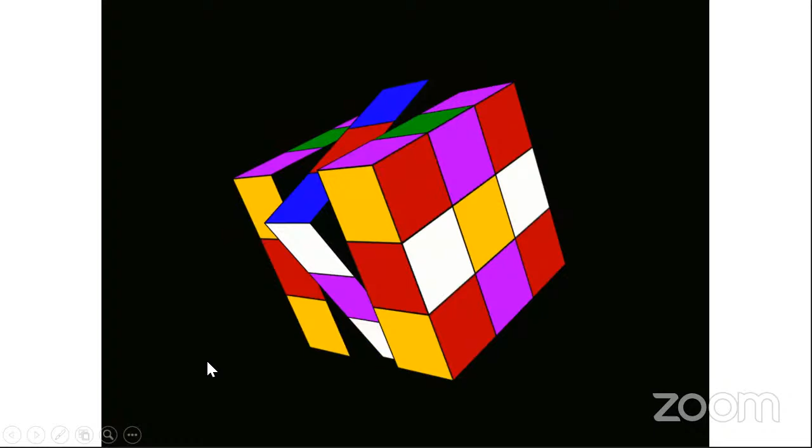So if your passion is problem solving, then definitely look at this Rubik's Cube. If you're interested in getting the solution for this Rubik's Cube, definitely you are here for the right choice of program of study, which is called engineering.

What does engineering do? Engineering is primarily to fix broken problems, because there are either opportunities for something new or something already broken that needs fixing. As the Vice Chancellor said earlier, quoting Einstein, the training of the mind is to think more than the actual fact obtained. And that's exactly what engineering does.

Scientists tend to explore the natural world and discover new things about the universe and how it works, whereas an engineer applies that learned knowledge to solve practical problems, often focusing on cost, efficiency, and other limits. Scientists observe the world, while engineers focus on creating it. And that's where thinking matters.

The modern era we live in would not have been possible without the marvels of engineering, as the Honorable Vice Chancellor mentioned earlier—whether it be a microchip, high-speed vehicles, mobile networks, automated cars, electric vehicles, whatever you see right now, or even these automated assembly lines.

Scientists generally investigate what is already present, but engineers tend to create what has never been there before. So it's actually a science to describe electromagnetic radiation, which you must have studied in the 12th standard, but it's actually engineering to build a radio or a television. Many of the so-called wonders of modern science are actually wonders of modern engineering.

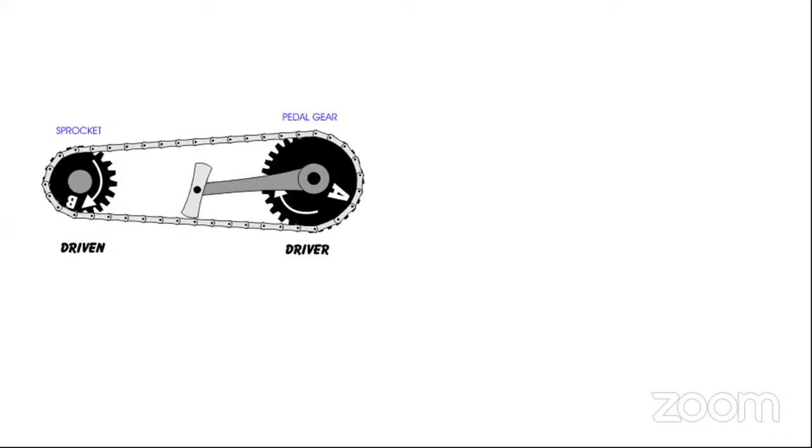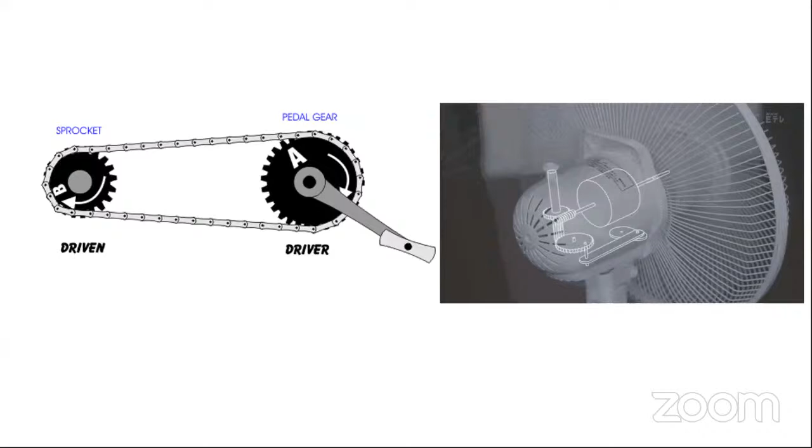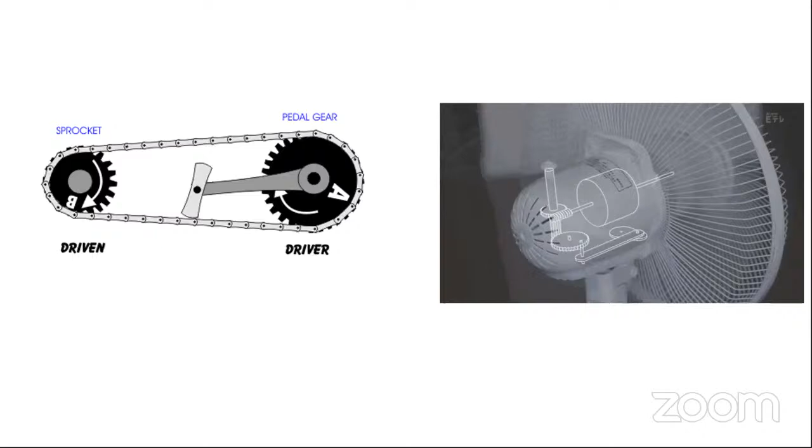Look at this standard cycle, which most of you would have used, at least in younger age - the pedal and the gear. This is nothing but a standard cycle, but if you're more interested to know about this, this is exactly where engineering comes in. Or look at this in terms of the worm gear - this is typically a table fan, which some of you must be using. You can see the transparent gear, the worm gear, which actually makes the fan rotate. That's nothing but engineering. But actually, we miss out on many of these day-to-day common things of engineering.

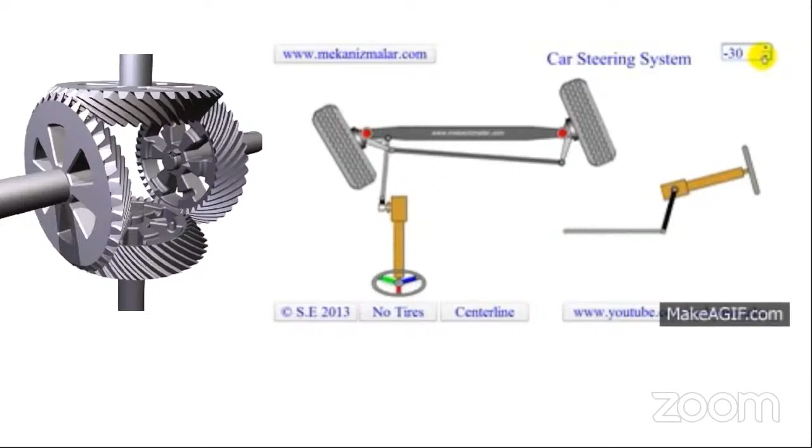Or look at this - this is nothing but a worm gear, used as a tuning mechanism, including in your guitars, mandolin, and things like that. See this example. This is a car steering mechanism, where the steering is used to turn the front wheels either left or right, depending on how you'd like to do that. If you're interested to know how these things work, then engineering is the right discipline for you. There are very interesting things to find out, because these things have existed for a while, and we believe there is something which invokes curiosity in our minds.

Given this, I also thought I should show you a small picture of these automated assembly lines mentioned earlier. Look at this. If you're interested in working in these kind of shop floors, then this is exactly where you need to look at engineering. Or if you're looking at this situation, where you have a remote control with a robot, where you'd like to have your dog playing around doing tricks and all that, then you can actually build some of these things in engineering and get your curiosity filled.

I'm sure you would have seen it from some of your friends or probably in movies. But if you want to do it for yourself, you can actually do it in the labs here. This is the beauty of engineering.

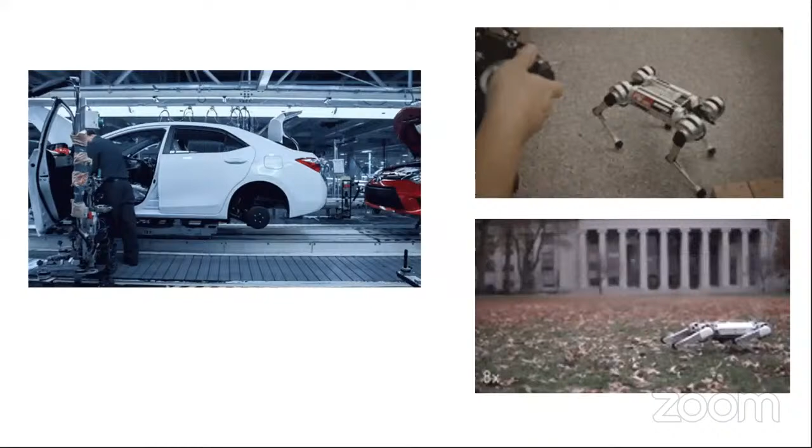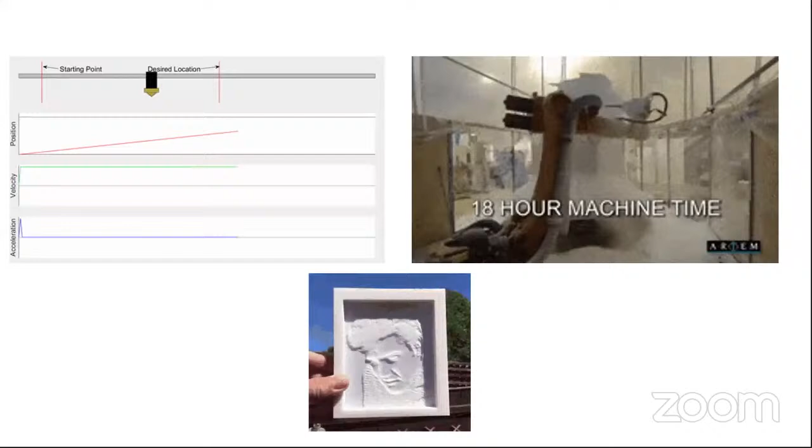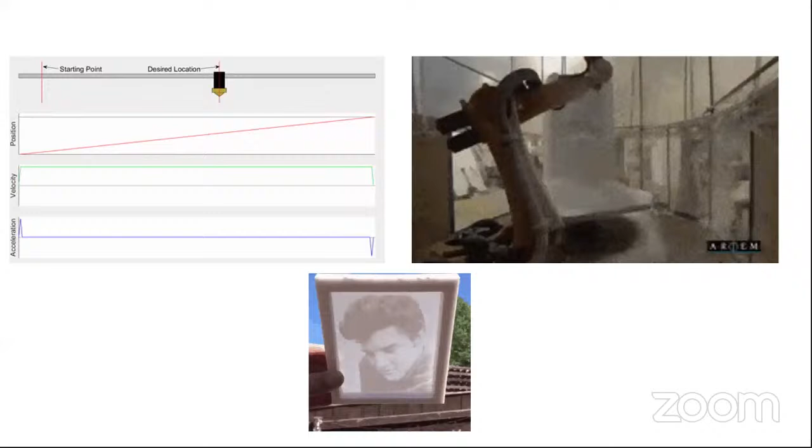Or look at this - this is what we call a computer numerical control machine, CNC machines as we call them. Look at the other side, on the right-hand side, on how it's trying to build. Or look at this other one - these are nothing but the 3D printing machines which you have. And we are living in the future right now, as you can see a 3D picture of Elvis Presley. In fact, if you want, you can do your favorite Sachin Tendulkar or any cricket fan, whomsoever you like. That machine, which you can see, is the one which actually translates down into the lower frame, which decides how it goes about.

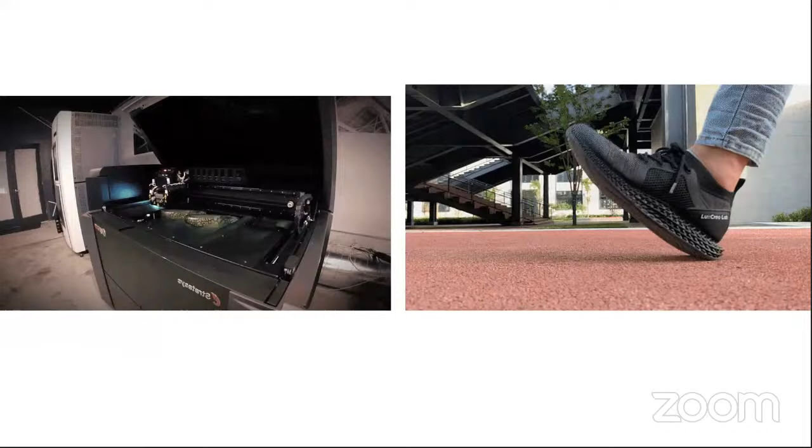Or look at this, another example of a small 3D machine which is actually printing. And look at this picture on the right, where it's enabling you to do 3D printing of a waterproof shoe with the midsoles and all that, which is actually being claimed and practiced using the current day technologies of engineering.

Or look at this aspect of what we talked about - synthesizing connections across areas. There's a purple colored chair of 3 different types here, and then you have the various components, which looks like an IKEA showroom piece, and then you have the small components of an aeroplane wooden piece assembled. Now, if you want to synthesize all these connections across, this is exactly what engineering does. So synthesis is nothing but combining information from multiple sources to form conclusions and then act upon it.

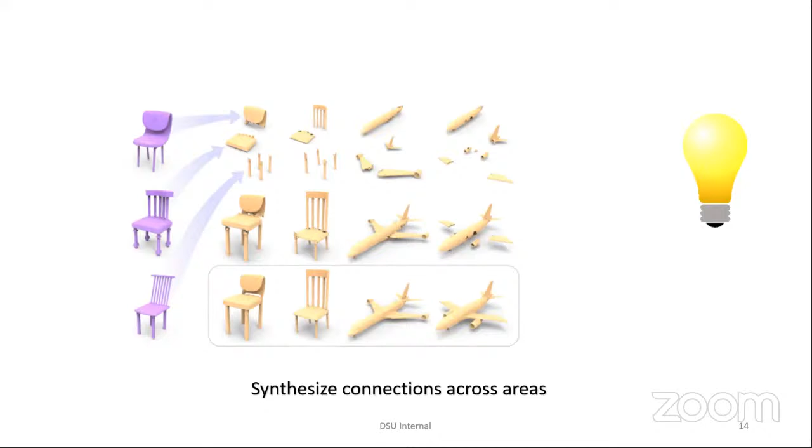Synthesizing is nothing but putting it together as your thinking changes. So all this is actually leading you to synthesizing connections.

Look at this small gearbox of your watch, the metal watch on the side. Each one of the gears is connected to each other, as you can see clearly in this animation going across.

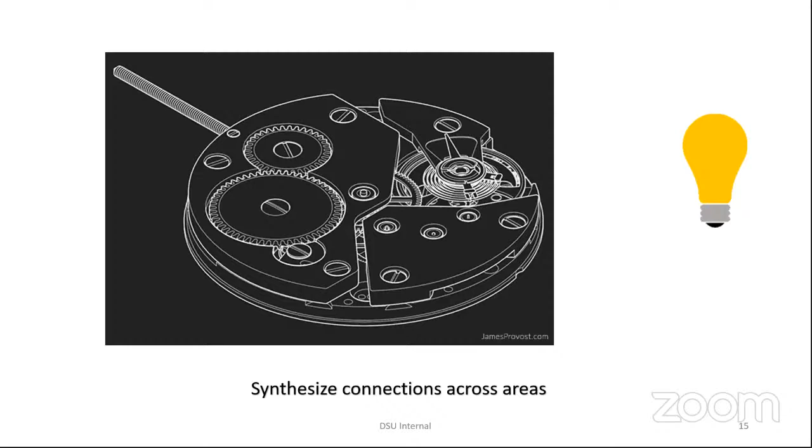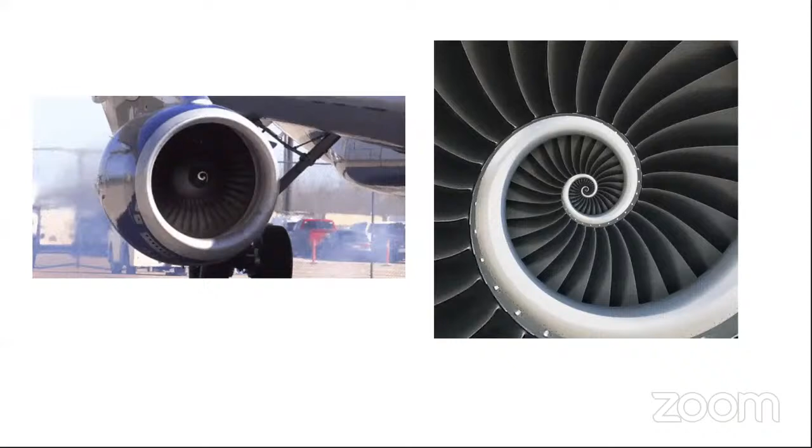And this is something where if your curiosity stokes in here, you need to be here in engineering.

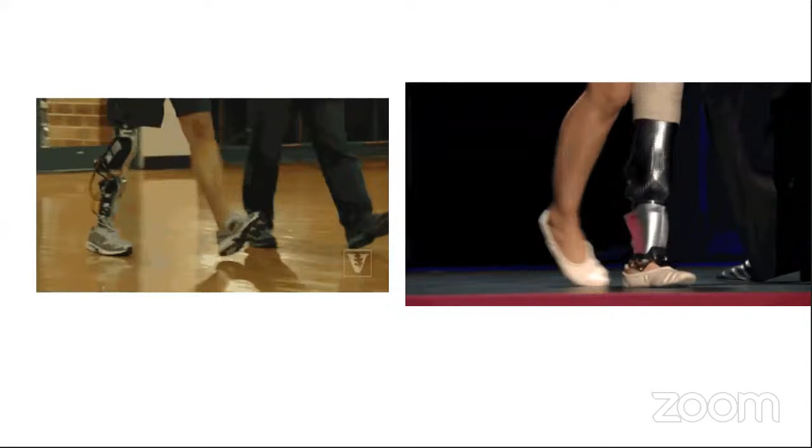Or look at this. In fact, Professor Murthy talked about biology engineering. This is a fact where we are having prosthetic limbs, where you can see one of them using a prosthetic limb. All this is actually related to engineering, because the way the person turns around, a lot of biomechanics goes around. But for that, the basics is nothing but engineering.

Ultimately, what does engineering lead you to? It leads you to intellectual development. And this is exactly what happens here.

Now, at the same time, be careful about curiosity, otherwise this is what is going to happen. So what I'm going to talk about now is very interesting for day-to-day life, but be careful on curiosity too. You have to have the safety aspect as well.

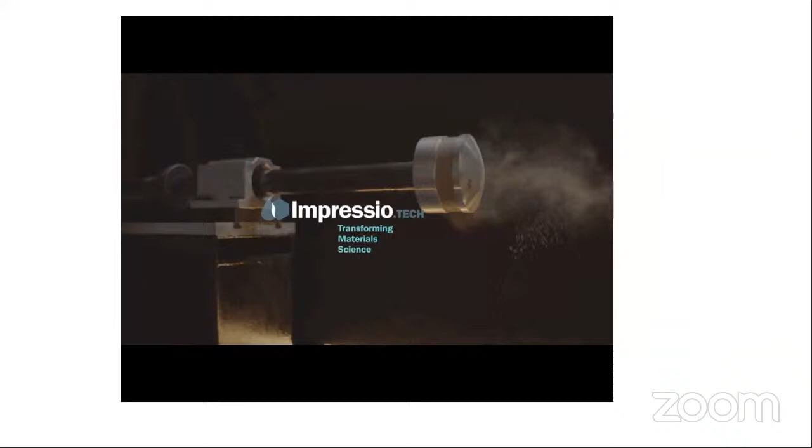This is what you will see right now. Look at this animation as to how the ball is actually going to hit the batsman. Or look at this, how he's going to hit the bowler and he's just trying to avoid that. All this is possible with helmet safety, as we can see here. Look at this - the helmet is actually being designed and it develops. What is this? This is nothing but engineering.

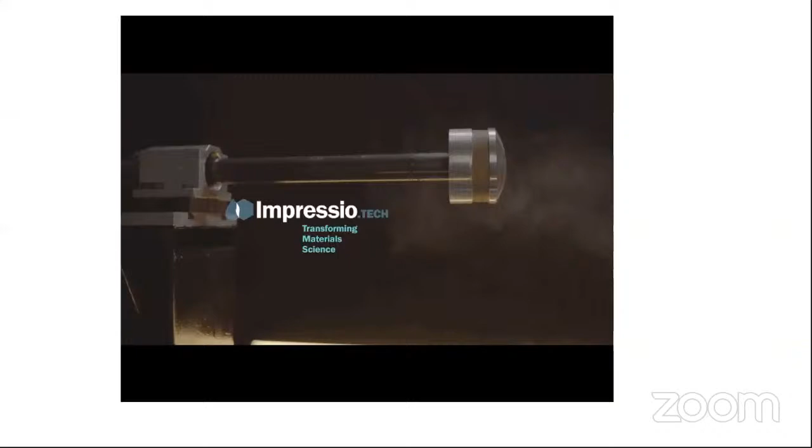And interestingly, it's coincidental with today's mechanical engineering, where a lot of these things are actually part of the way you can design. So if you want to be part of support staff or sports mechanical engineering, then this is exactly what you need to be in engineering.

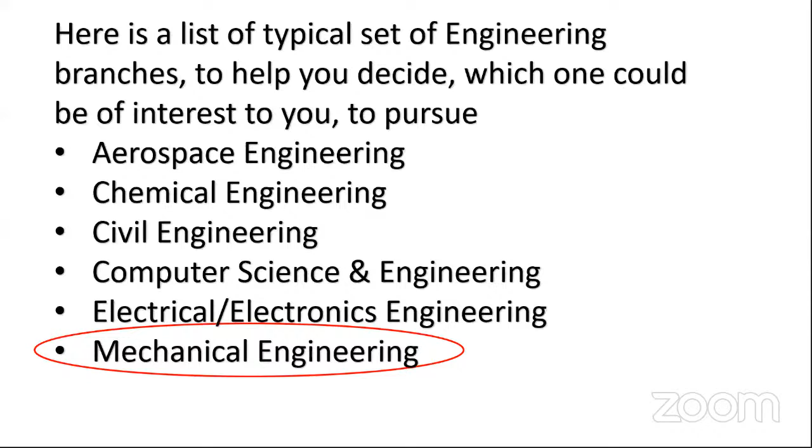So here is the typical list of branches which helps you decide which one you could choose. It's just a sample set listed in alphabetical order - aerospace, chemical, civil, and so on and so forth until mechanical. Today, incidentally, you'll be hearing a lot from Professor Rajagopal and my esteemed industry colleagues, who have actually been working in the field of mechanical engineering.

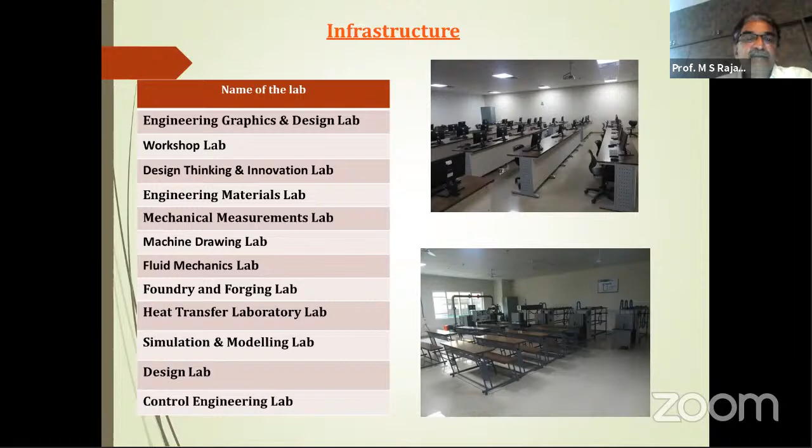As I was telling, this control engineering lab holds the key. This is where all the electronics is going to come and you're going to write a code to control the machines. The curriculum design is very important.

As we have seen, Arvind Srinivas took you through some fantastic examples of how simulation is possible. The aircraft used to take about 6 years to build; now we can build it in about 2 to 3 years. An automobile design cycle used to take typically 3 to 4 years; it has been cut down to 6 months to 1 year.

So how is this possible? It's a lot of contribution from the computer science. The mechanical engineers have given the domain knowledge, they have written the codes, and everything has become a software now.

In this curriculum design, what we do is we reinvent and continuously change to adapt to the new age demands. This is a typical function what we have.

So we have a departmental academic committee where all the professors meet, they attend various workshops, they do a lot of projects in industries, consultancy projects, and they come with lots of ideas. These are the things we can change. Then these thoughts are crystallized and we present it to the Board of Studies.

The Board of Studies meets twice a year. We have elite panelists in the Board of Studies, members both from academia as well as from industry, from different sectors of industry, and they will be constantly contributing, giving inputs to change the curriculum based on the needs of the industry.

We have the Board of Examiners who will maintain the quality of the evaluation scheme, so they scrutinize the question papers and the practices what we have. The Academic Council finally approves it, and finally the Board of Governors. So we change the syllabus accordingly. This is the typical flow.

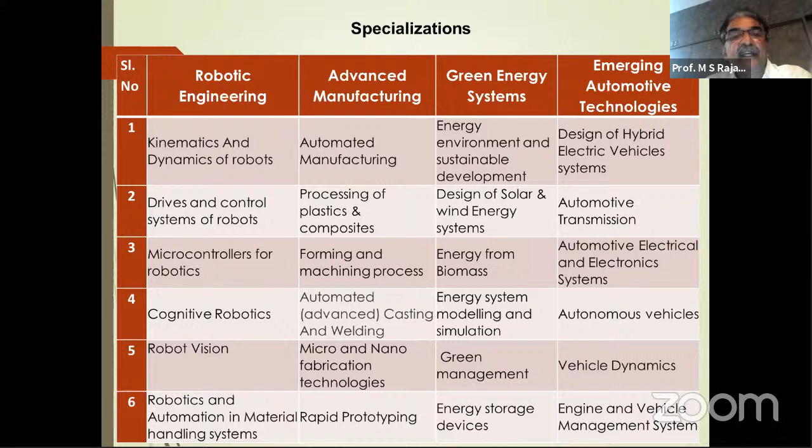What is a minor? A major in mechanical engineering can take a minor in aerospace, electronics, or CS, or even a minor in entrepreneurship. Mechanical engineering is completely getting redefined—it's becoming multidisciplinary, where electronics has become a must. A typical automobile, which used to be 95% mechanical, is now only about 60% mechanical, even IC engine based. Once electric vehicles come, I think it will go down to even 40 to 50%. So we are trying to inculcate that philosophy, that mindset, and bring it into the curriculum.

BTech honors is another idea where good students are advised to take MOOC courses, massive online courses, so they're free to express themselves. They can take a few courses on NPTEL, Coursera, Udemy, or edX—edX being Harvard and MIT. So students are given complete flexibility.

What does it hold for a typical student joining this year? 60% continuous internal assessment—earlier it was only 30% in the first year when we started this. Now that we have matured enough, we are extremely confident a student will learn more during internal assessment. We have a very good evaluation scheme: if a student doesn't perform well, we give him one more chance, and if he still doesn't do well, another chance. A student is encouraged to learn, express, and come out with better problem solving skills.

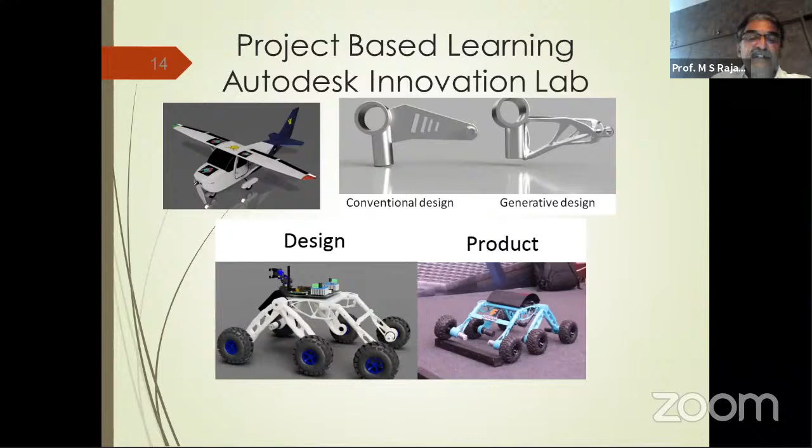We also have a space with a reverse engineering lab having a 3D scanner, as well as 3D printing machines. Whatever models you design, you can take a 3D printout of that. I don't know whether you're able to see the full screen.

This is the Bosch Rexroth Automation Technologies lab, another very critical lab for mechanical engineers. As we know, automation is key—jobs have come down, skills are changing as it becomes completely automated. Productivity enhancement has happened, and slowly laborers are being replaced by machines. Earlier India adopted a semi-skilled, semi-automatic approach; now it's slowly becoming completely automatic. So a mechanical engineer should learn automation basics.

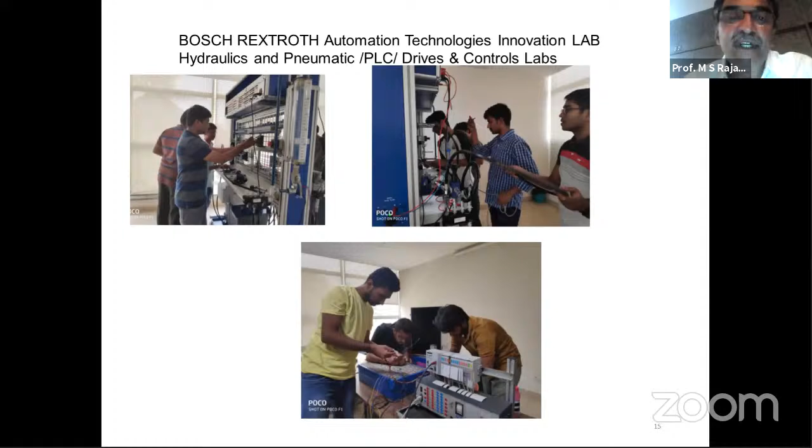So we have the hydraulics lab, pneumatics lab, programmable logic control, and drives and controls.

So design engineer, CAD engineer, CAE specialist, shop floor engineer - these are the old ones. Shop floor engineer, production supervisor, planning engineer - everything is getting automated. Earlier there used to be at least about 10 production engineers in a shop, now there will be only one. So methods engineer continuously makes improvements, quality assurance, maintenance, safety, R&D, marketing, and so on.

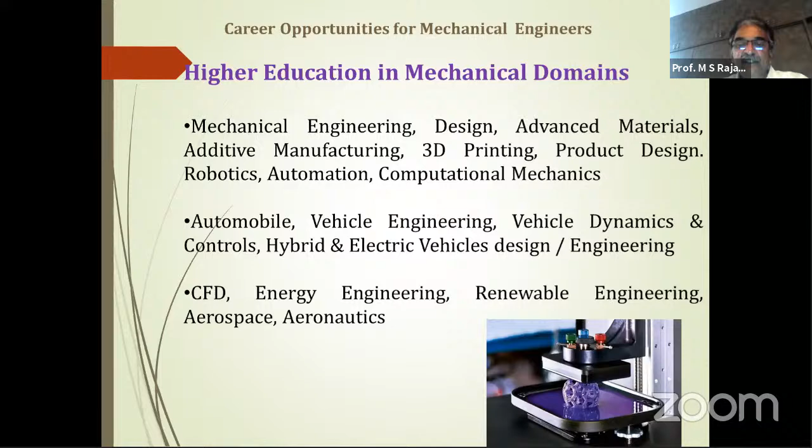Then don't forget the major one, automobile and aerospace. So automobile, vehicle dynamics, vehicle engineering, controls, then computational fluid dynamics, energy engineering on the thermal side, renewable engineering, aerospace, aeronautics. And now it is open for interdisciplinary study.

A mechanical engineer can do a master's in biomedical or environmental engineering, or in mechatronics, also in data analytics, AI and ML, and IoT. So these are the other avenues which are now opening up.

Okay, and what are the skills we are trying to inculcate in a mechanical engineering student. We have virtually all the software - CAD, CAM, CAE software. Product design is a must. As I told you, typically all students will do about 6 to 8 product designs.

Automation technologies lab, I told you about the innovation labs. In addition to that, we have introduced programming skills - you are going to do 2 programs in the first year itself. We also have special topics where you will use AI and ML for mechanical projects, data analytics and IoT. In the open electives also, you'll be able to learn these subjects.

So I think I will close at this, maybe I took a little bit more time. As a closing remark, mechanical engineering has been completely redefined. You should be an all-rounder. You should be strong in your basics of mechanical engineering, plus you should know a good amount of electronics, and you will be trained very well in programming. With electronics and programming skills and sound mechanical engineering knowledge, you are most sought after in the industry.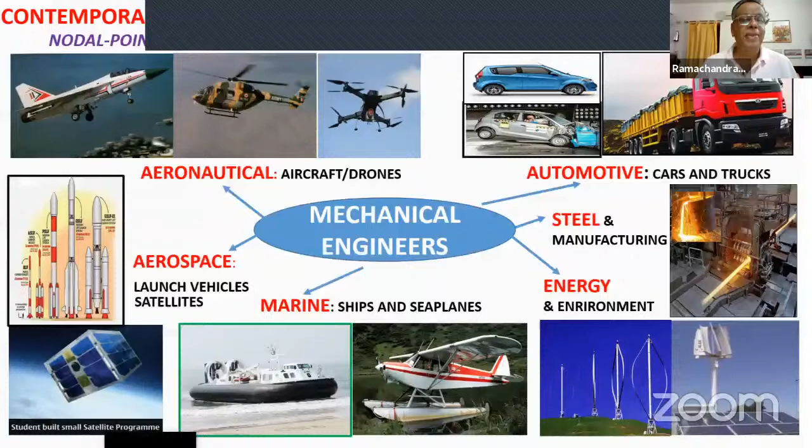It's a bit of a loaded slide, but traditional mechanical engineering still remains one of the core engineering disciplines, notwithstanding the passage of time. So much advancement has taken place in the last few decades, and therefore efficiency has improved - efficiency of development, efficiency of training students - and therefore time and cost of engineering development has become the core focus.

The engineering curriculum is therefore continuously being redesigned to address this dynamic environment the Vice Chancellor was talking about. There is continuous and effective reorientation and retraining of mechanical engineers, and this has been endorsed fairly well by the New Education Policy, Niti Aayog, AICTE, UGC, and universities - DSU, for example, is very sensitive to this need.

The present dip, which you might view with suspicion, is a very temporary aberration and you don't have to worry about it - it's bound to spring back. If you look at various studies, the projected growth of employment of mechanical engineers in the country and globally, per the Bureau of Labor Statistics, is going to be about 10% by 2026. So we need to shed this fear or apprehension and look at mechanical engineering as a core discipline you can opt for.

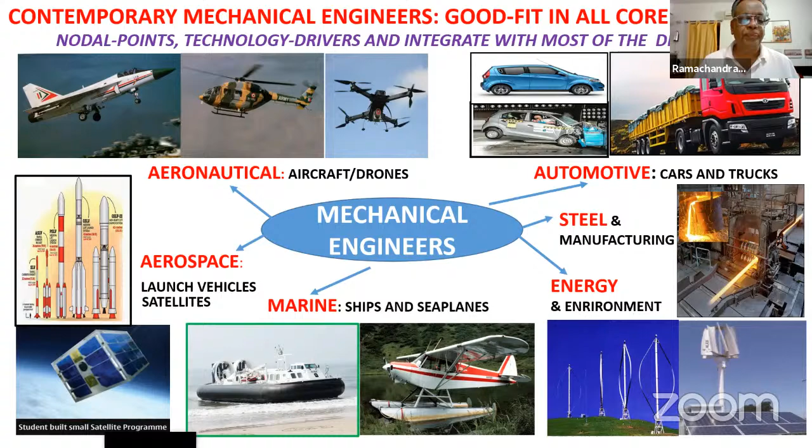I just wanted to highlight the typical staffing and training pattern and effort required for any industry, particularly with reference to mechanical engineering in industry and R&D labs. Take for example an advanced technology product development agency or an R&D establishment - the training focus for mechanical engineers coming out of engineering institutions has this focus: multitasking, multidisciplinary and interdisciplinary work, and teamwork. Graduates need to be trained and placed into industry across various disciplines.

Look at the top bar I've projected. If you look at a team, an organization with a strength of about 400 to 500 engineers, typically this is the distribution of different disciplines. Mechanical engineers constitute about 30 to 60% of the entire engineering team strength in any typical industry of that size.

And of course, there are electronics, computer science, telecom personnel, material engineers, electrical, and administrative MBA guys. This is the sort of scenario where you can see that a typical organization of this size might have 30 to 60%, and in some cases even 70%, mechanical engineers. And I'm not talking about the IT industry, but typical product development industry or major industries.

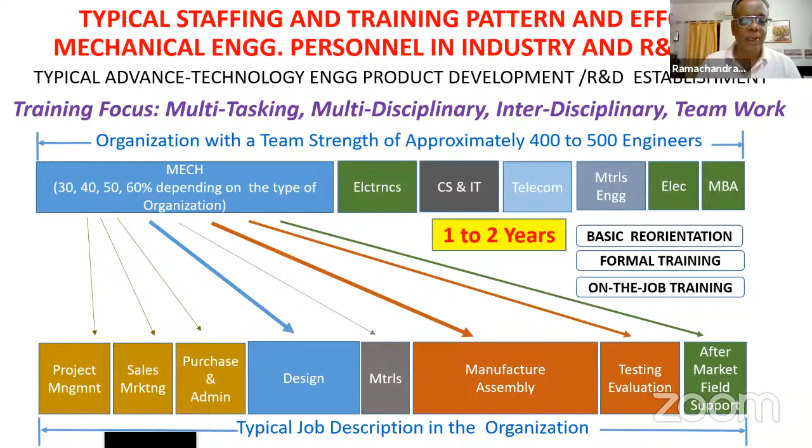So this is something which I wanted to tell: the need, the type of expectation, redefining the expectations and the role of mechanical engineers in the present, changing context is shown here. The expected skill profile of mechanical engineering, if you see, it is a changing scenario. It's a very dynamic scenario.

And the university is making its best effort to bridge this gap. And what is the gap I'm talking about? The present scenario is in the top half of it, shown as present or previous. What we are expecting is shown below as a comparison.

The theoretical and practical knowledge in basic work is a limited one. I'm not saying everybody is not good, but it is limited by the time that we have. Unfortunately, this is the state of affairs. The knowledge in allied fields—a mechanical engineer doesn't have much exposure to related fields, maybe electronics, maybe computer science. He has got very little time and training, and therefore the knowledge base in these allied fields is very minimal.

And if you see the next one, hands-on experience is also not very good. We don't have enough time and effort put in to get good hands-on experience. And there is some good project work going on. The communication skills are not bad, but not as good as they should be.

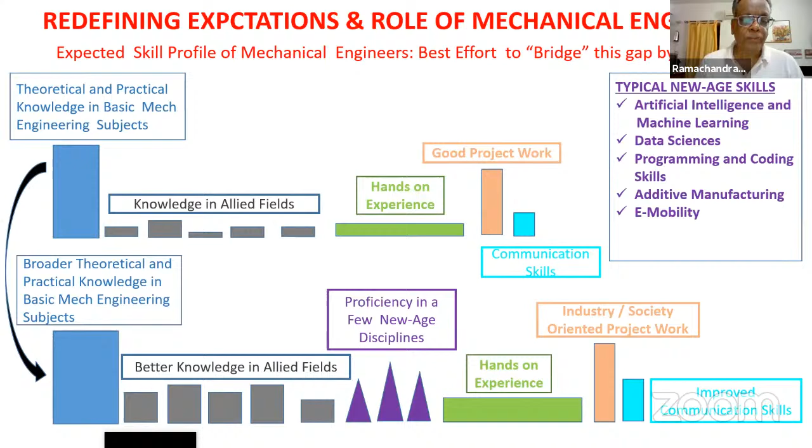Now, if you look at what is likely to happen once we enter the DSU Department of Mechanical Engineering, the different advanced technologies mechanical engineering students will be exposed to during their industrial internship programs, the University Innovation Center which Dr. Rajgopal was talking about, tinkering labs, and several multidisciplinary and interdisciplinary industry-driven projects mentored by faculty and external experts. You can see, for example, mechanical engineering technology for aerospace propulsion.

You're not simply a mechanical engineer. You're with a mechanical engineering background, but with the type of input and training you get, you will fit in very well for these applications, and you will be exposed to these technologies. Aerospace propulsion systems, for example bearings, magnetic levitation bearings, advanced high-temperature alloys, composite materials, and so on.

It's also possible you may be interested in and supported for looking at drones, marine vehicles, hybrid vehicles, networked systems, advanced data processing. And of course, e-mobility vehicles, autonomous vehicles, range extenders, charging station networks, battery technologies, and fuel cells. Not to forget the emerging technology of advanced or additive manufacturing of gas turbine parts, very complex and critical, and automotive components and subsystems.

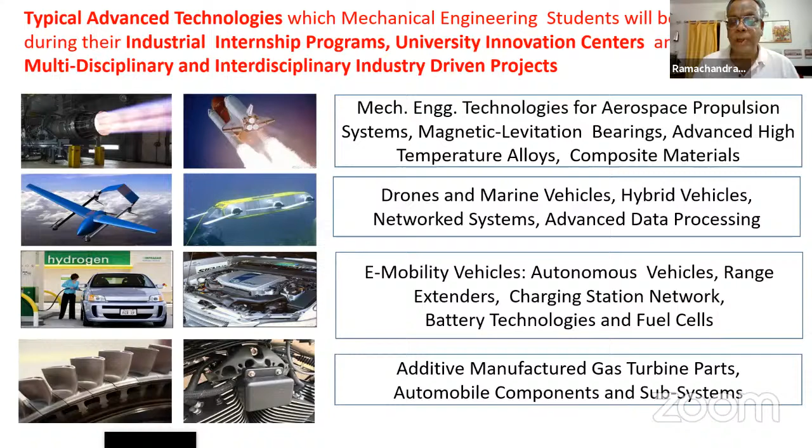So this is what you will be exposed to today, which was not there before. I want to look at three small video clips here. These are typical examples of the capabilities of mechanical engineering students who have done projects in advanced technologies, including a bit of robotics, automation, artificial intelligence, and so on.

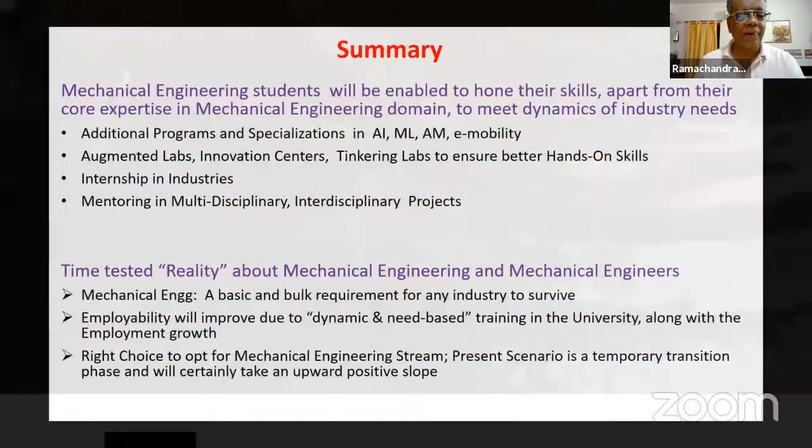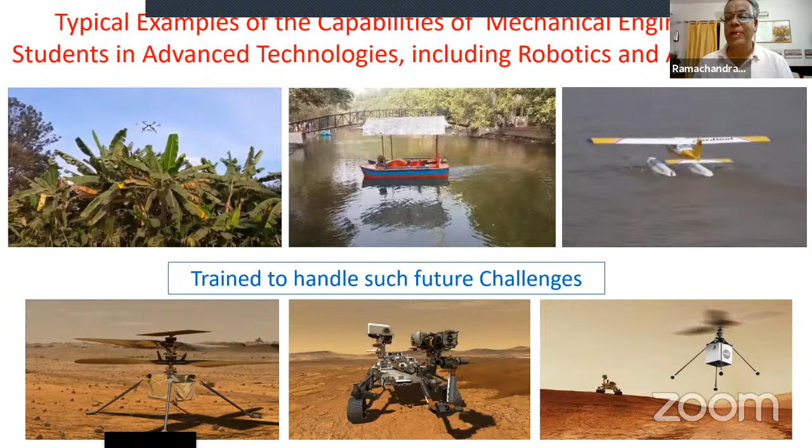The next one - you can see what the students can do, it's something amazing. This is a seaplane, which combines aerodynamics and hydrodynamics. The students are able to design, manufacture, and fly them, and to understand the subject of seaplanes well. This is likely to get into a bigger business.

With this background, today the mechanical engineers are trained to handle - there's no video now, don't worry about it - they're trained to handle such future challenges. I'm sure you students there have seen this many more times.

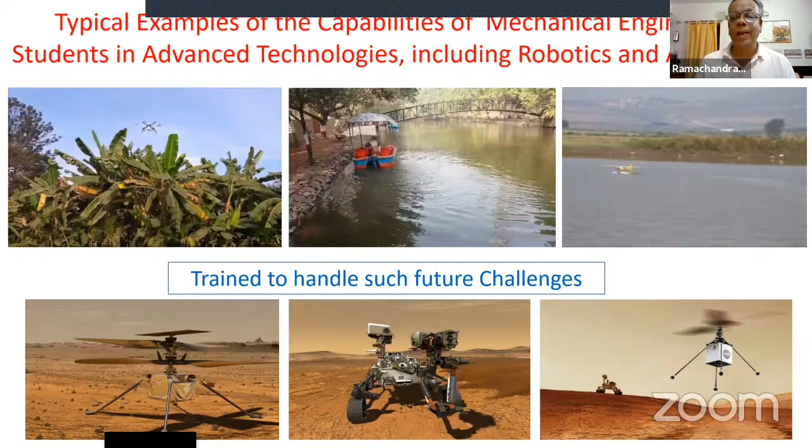This is the drone in the NASA mission, trying to gather information on Mars. This is a rover in the center, and that is the drone, flying all through ground control, thousands and thousands of kilometers away. So this is what you're capable of doing, what you'll be made capable of doing. This is the challenge which the mechanical students will face and succeed.

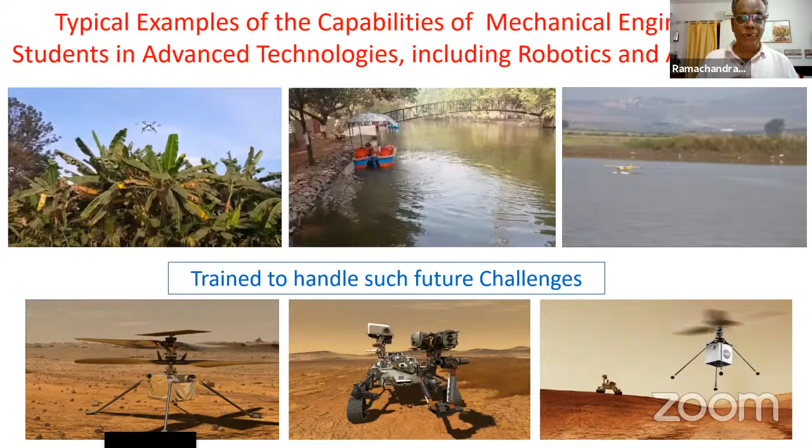Next, Srinivas, this is the last one.

So the summary is that mechanical students will be enabled to hone their skills to get the core expertise in mechanical engineering domain, to meet the dynamics of the present situation. Additional programs and specialization in artificial intelligence, machine learning, additive manufacturing, e-mobility, we all talked about. You can specialize in any one of them with a huge background of mechanical engineering.

The university will provide augmented lab facilities, innovation centers, and tinkering labs to ensure better hands-on skills. We have internship programs, which Dr. Rajkumar was mentioning, mentoring in multidisciplinary and interdisciplinary areas. This is a must. You don't have to have blinkers on and say, I am mechanical engineering, I don't know anything about that. You're no good. You must have multidisciplinary exposure, and you'll be trained and supported to take up these activities.

To state the obvious, mechanical engineering, the time-tested reality, is the basic building block for any industry. Mechanical engineering is a basic and bulk requirement for any industry to survive. Employability will improve due to the dynamic and need-based training in the university. The university is making a lot of effort to get all these things in position before you come into the system as students of mechanical engineering.

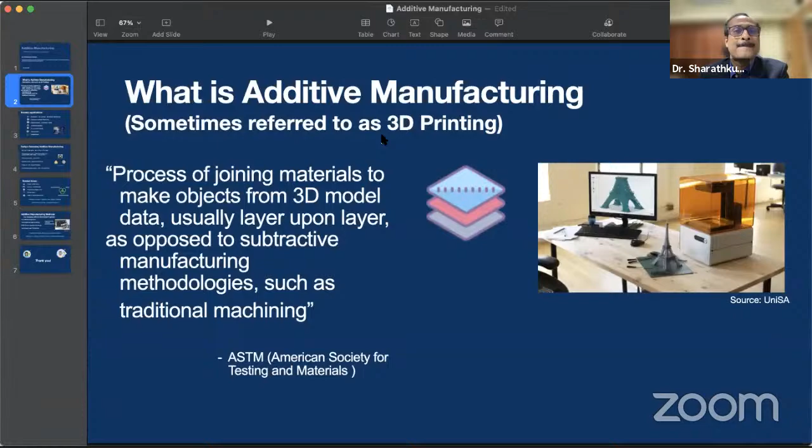Let's start with what is additive manufacturing. It's sometimes also referred to as 3D printing. It's a process of joining materials to make objects from 3D models. I've got a picture on the right of the Eiffel Tower - a CAD model, and then you actually make the product layer by layer using computational methods and material. There's a machine on the right, and at the center is the actual product manufactured by this computational method. This is a layer-by-layer methodology, as opposed to subtractive manufacturing, like machining, milling, or grinding. Compared to that, you're actually adding metal or material to create the part.

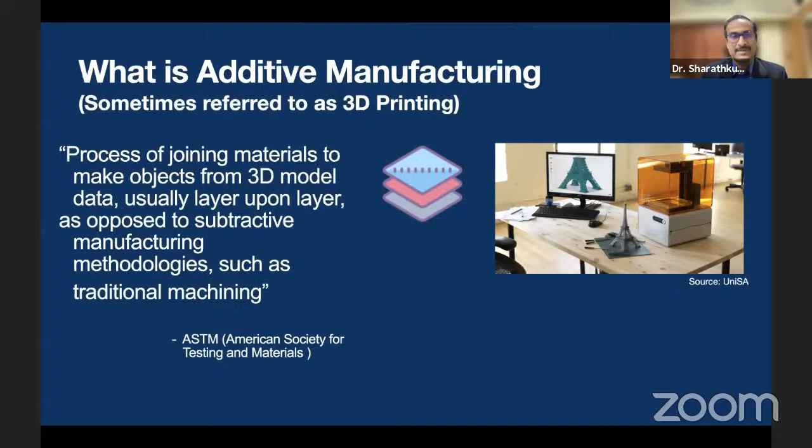So what are the industry applications? Let's start with aerospace. The aerospace industry typically tends to have low volumes and very specialized applications. For example, the Mars mission or the Moon mission - there is only one of a kind which takes that part. In these situations, it's extremely important that you're able to meet all the requirements, like high temperature requirements. The previous speaker spoke about being sustainable - how do we reduce emissions? One way is to improve jet engine technologies, and for that you need better fuel injectors, which are made using additive manufacturing today.

The next interesting area is coming because of the advent of electric mobility, propulsion, as well as land-based electric cars and automotives. So you're going to have electronics and consumer products which release a lot of heat and need high performance. Those parts had to be made using additive manufacturing.

The next emerging area is the medical industry. For example, dental prosthetics, orthodontics, or the parts shown by my previous speaker that help people who are physically challenged - they are all today made customized to the human being using additive manufacturing. There's also an emerging area of how we can make human-like tissues, called biomaterials. The questions of ethics and so forth are being solved, but in the future this is going to be a reality which will improve the quality of human beings.

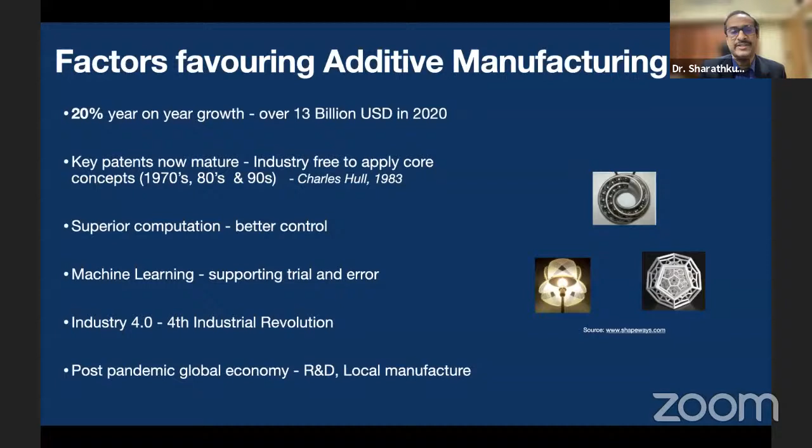What are the related areas? Well, this is a very exciting space: physics, laser, optics, electromagnetics, so many areas of physics are connected here. You're also talking of chemistry, material science, whether it is composite polymers or metallic materials, what are their properties? People don't have data. This is a very new science. We have some data about powder metallurgy, but additive manufacturing materials is a very, very young stage of the industry, so there is enough opportunity to do research and also practice in these areas.

The next emerging area, of course all of you are aware, is computer-aided design. The next is process physics: how controlling the voltage, current, or speed of these laser scanned material beams can control the properties of the material, how can I make it more strong and with fewer defects. This kind of study is possible today thanks to the advancements we talked about.

Lastly, many core mechanical engineers in the past 15, 20, 30 years would say the heart of it was design for analysis, design for manufacturing, design for assembly. But today a new area important for mechanical engineers is design for additive manufacturing: how do I design a part so that it can be easily, cost-effectively manufactured using additive manufacturing? This is a very, very important field emerging today.

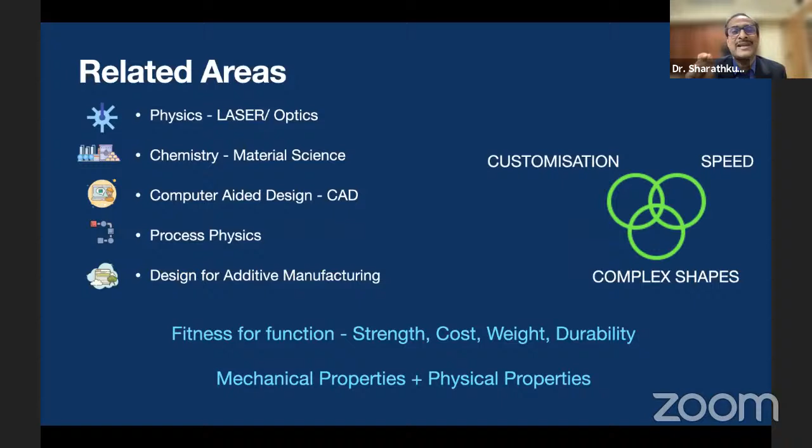On the right side, today, wherever there is a need for customization, for example a bicycle which is suited to me, the speed of manufacture and the complexity of the shapes, the most suitable candidate of manufacturing today is additive manufacturing. Some of the methods that I'm talking about, these are the four.

Today it's prototyping, which means the parts which you can test. But it is going to be used more for tooling, and the end parts are also going to be made using additive manufacturing. So the trend will be more and more parts. The actual parts you use and will be having access to might be made by additive manufacturing.

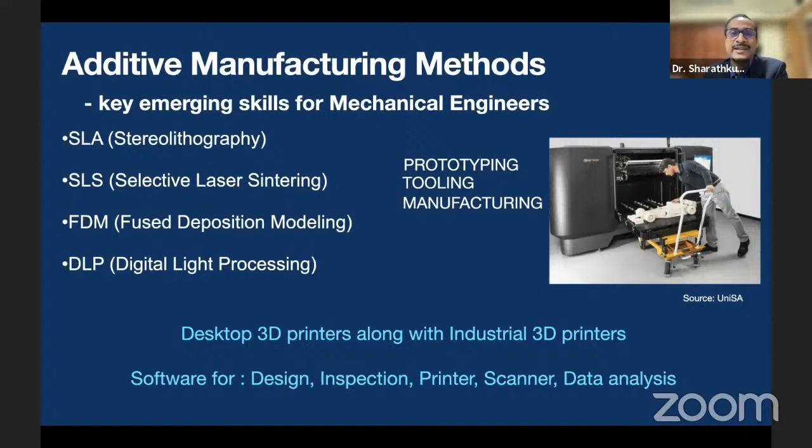So in summary, I would like to say that additive manufacturing has come a long way. More and more reliability is there. The cost and the efficiency is improving, and there are many factors in its advantage, which will, from four years from now, place it at a very competitive level compared to all other manufacturing methods, and in turn create a lot of opportunities for mechanical engineers.